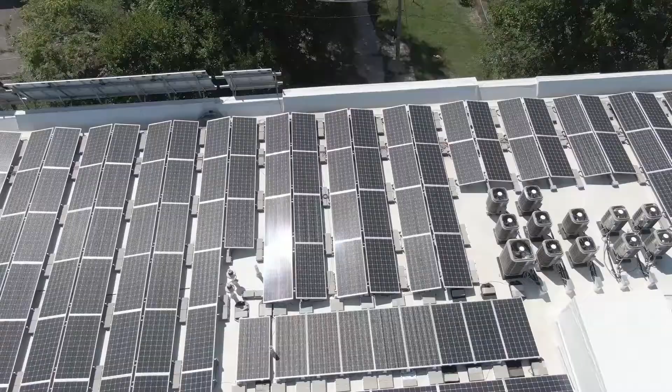There is an ever-growing need to act against climate change, with global average temperatures rising year on year. Innovative solutions to reduce greenhouse gas emissions are vital. Globally, energy use accounts for around 3/4 of greenhouse gas emissions, with energy use within buildings making up around 1/4 of this. This project aims to optimize energy dispatch of buildings modeled as a multi-energy system, MES, and to validate

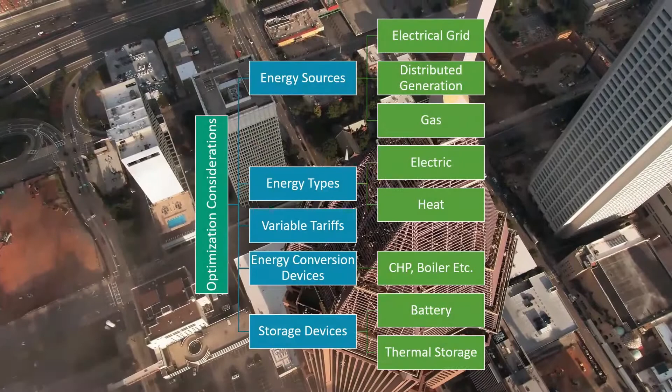the approach. Optimizing using MES models provides benefit not available in other methods, as the interaction of different energy sources, conversion between energy types, and variable energy costs are considered. This allows clients to better utilize existing infrastructure, as buildings are inherently multi-energy systems, with benefits like reduced running costs and more effective dispatch of distributed generation.

To meet this aim, 7 high-level objectives were created, consisting of reviewing literature, modeling MES, optimization of various criteria, predicting future demands, implementing an MES controller, and implementing an MES emulator. Finally, evaluating performance qualified the work conducted.

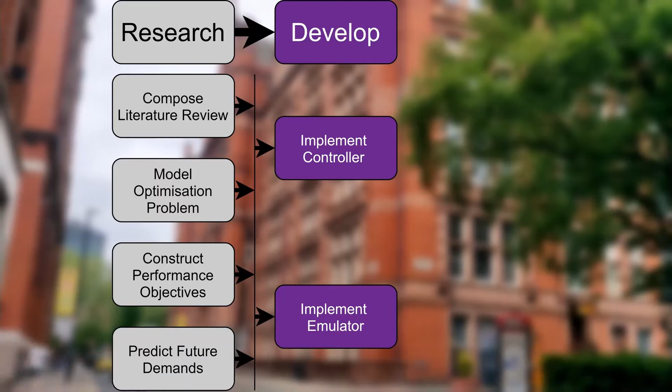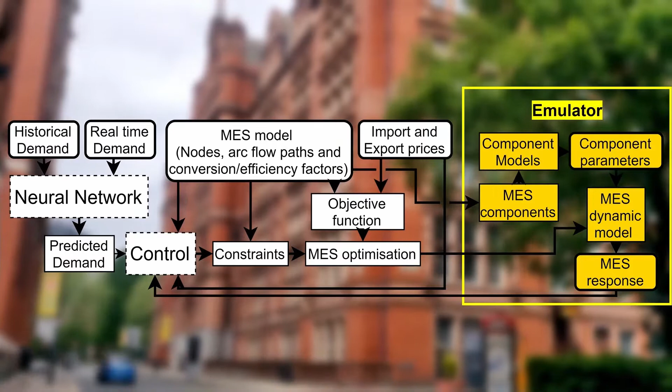The block diagram shows the developed system split into its constituent parts: the MES emulator shown in yellow and the MES controller shown in purple and grey. Model predictive control was used as it allows continuous optimization over a set period or horizon that moves forward in time. Each iteration, the controller, after implementing the first step, re-optimizes over the new horizon, accounting for new sample data,

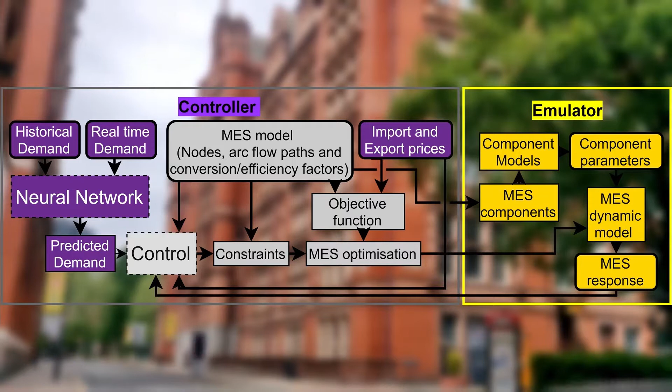resulting in better decisions. To maximize the impact the controller decisions have, building consumption forecasts are required. A neural network was developed and trained using historical datasets that provided robust and accurate predictions of demand.

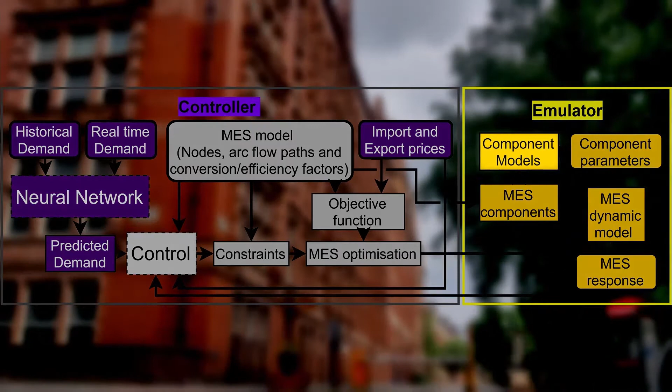The emulator shown in yellow has been developed in place of a real MES, as controlling real physical systems can pose significant risks to potential clients. This is especially important while testing of the controller is still ongoing. Therefore, the emulator is also the team's testing environment, which both validates the controller's actions and generates the starting conditions for subsequent optimization. For this, a library of dynamic thermal and electrical component models were created that offer a more realistic response. After implementing the design framework, both the controller and emulator were configured to work in partnership.

A dashboard has been developed to display live and updating operating metrics to end users, providing a comprehensive overview of controller performance. For example, virtual meters showing consumption, controller future decision plots, and forecast error over the last 24 hours. The controller and emulator responses were validated using 4 case studies, and a summary of the findings are described here and shown through the user interface.

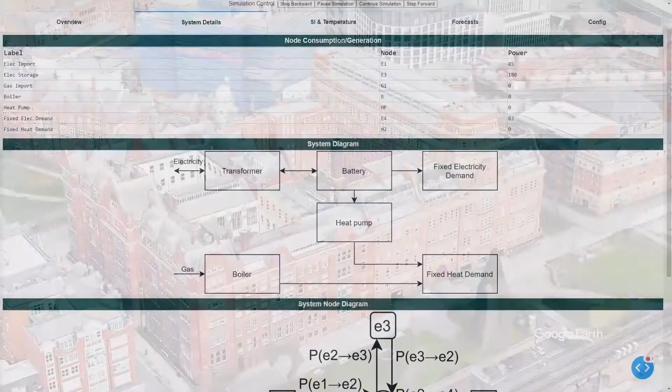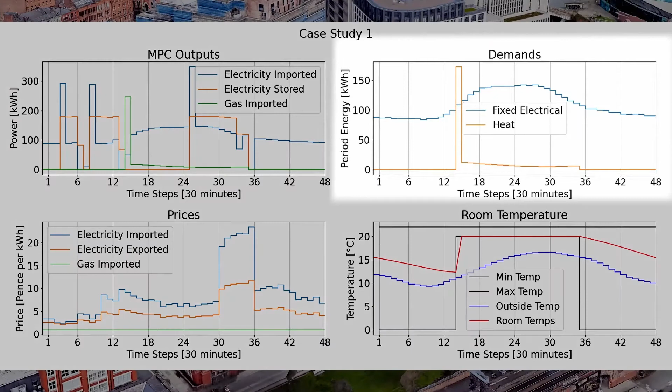The complexity of the MES was steadily increased, with studies carried out both in winter and summer to ensure system reliability throughout the year. Initial studies were conducted on this MES. The results obtained validated the controller's operation, as fixed demand was met and room temperature was within the predefined range throughout the day simulated. The emulator gave the overall actual component use and room temperature, which again validated both the controller and emulator's operation. As seen here, the boiler was consistently favoured over the heat pump by the controller due to the cheap gas import costs compared to electricity.

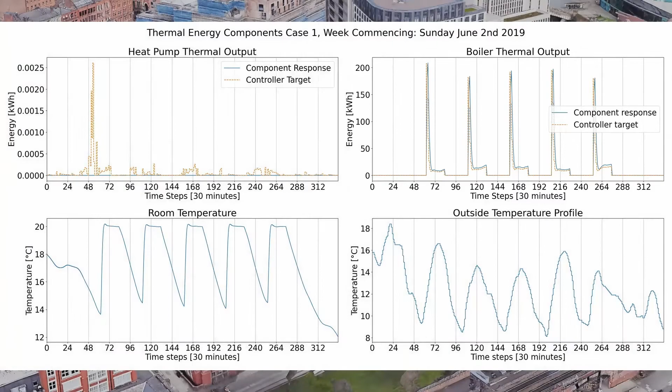Next, local renewable generation in the form of solar was integrated into the multi-energy system, along with flexible electrical demand that was both schedulable and interruptible. To observe the effect solar generation had on the optimal dispatch clearly, a large array of 1 megawatt was used. In the scenarios constructed, solar power was used to help meet fixed electrical demand, which reduced multi-energy system running costs for the week by around £700 in the summer and £150 in the winter.

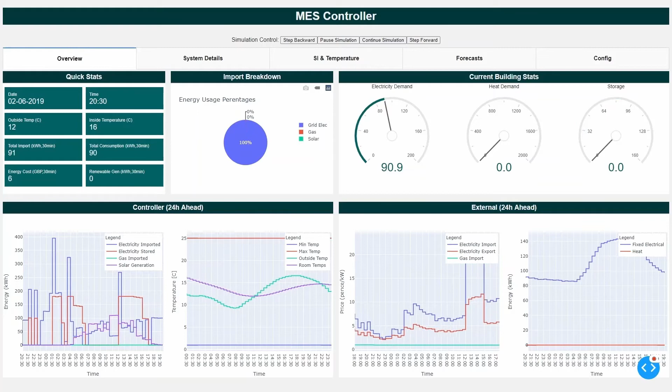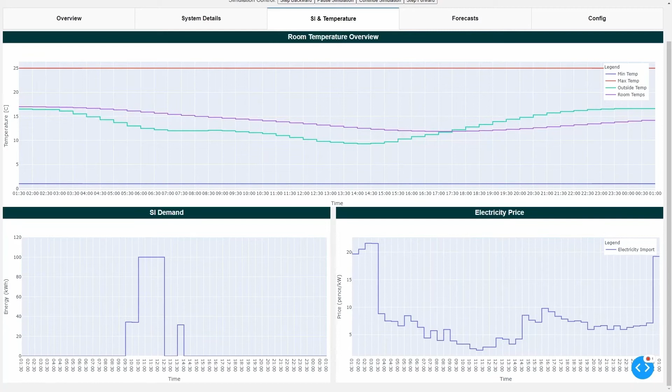When SI demand was integrated, it was met by the MES when electricity import price was lowest over the scheduling period. The team concluded that significant savings could be made when allowing demand to be met in this manner, saving around £100 over the course of a week.

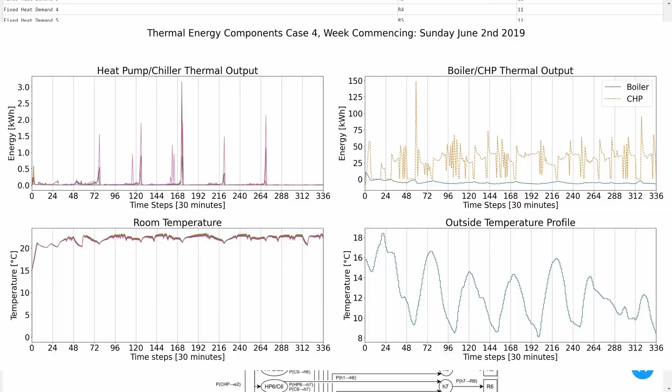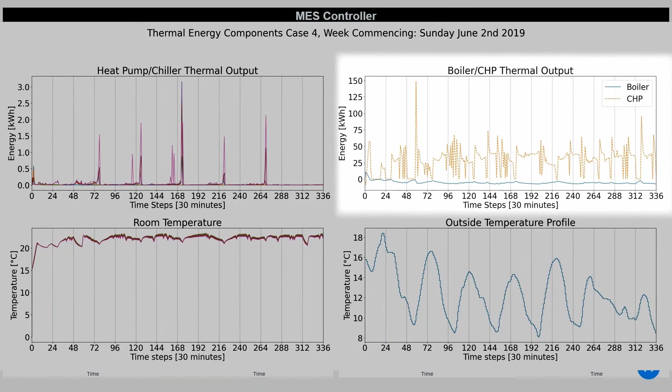Finally, the robustness of the framework was scrutinized by implementing this complex MES. The resulting response from the emulator's perspective revealed that all 7 room temperatures were kept at the upper boundary, as the inclusion of CHP enabled surplus electricity to be dispatched cheaper than importing electricity from the grid.

Overall, the project has achieved what was set out in the initial scope and beyond, with a considerable amount of development work on both the scalable and adaptable MES controller and emulator being completed. The core objectives and much of the stretch goals have been met, such as the development of an adaptable demand predictor, renewable integration into the framework, and flexible demand control. On the other hand, optimization based on multiple criteria was not achieved.